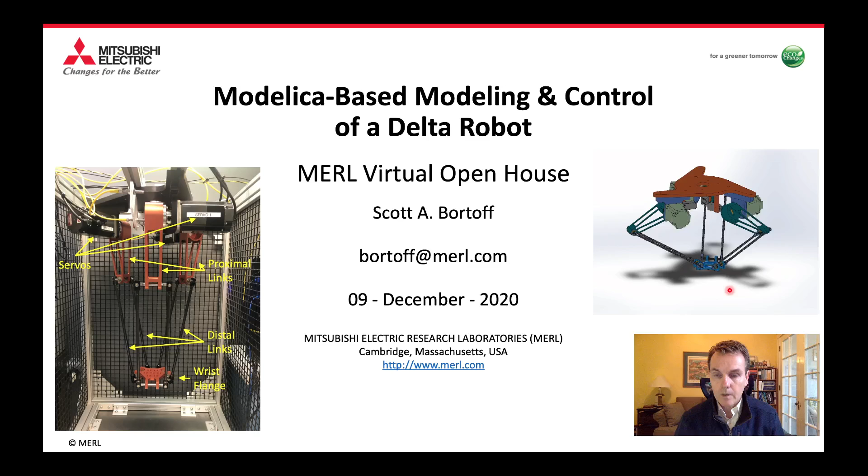So if you're not familiar with Delta robots, here's a movie of one up here. They're interesting closed chain manipulators that are actually very useful for what we're trying to do.

Our long-term goal is to develop robotic technology that enables mechanical assembly of complex things like this cell phone, which consists of many small parts and plugs and things like that. It turns out the Delta robot has a number of good properties for that problem, so we've built one at MERL, and we're developing the control technology for that, which is based on modeling both the robot and the mechanical task here, all the parts that get assembled.

It's an exercise in controlling contact and collisions. The mathematics and techniques we use for modeling and control can be applied to a lot of other problems, some toys and some serious problems we see at Mitsubishi Electric. For example, in an elevator shaft where you have a rope like this, as it comes over the sheave, it comes into and out of contact with the sheave. That physics can be modeled along with the bending of the rope and the motion of the cars using the mathematics we've developed here.

Similarly, things like this toy ball maze, where the ball rolls in the maze and comes into and out of contact with the rings, is a similar problem with loss of contact and recontact. You're trying to manipulate the maze to get the ball into the center. That's a problem where we've not only modeled it for simulation, but used that model to design a feedback controller to solve the ball maze.

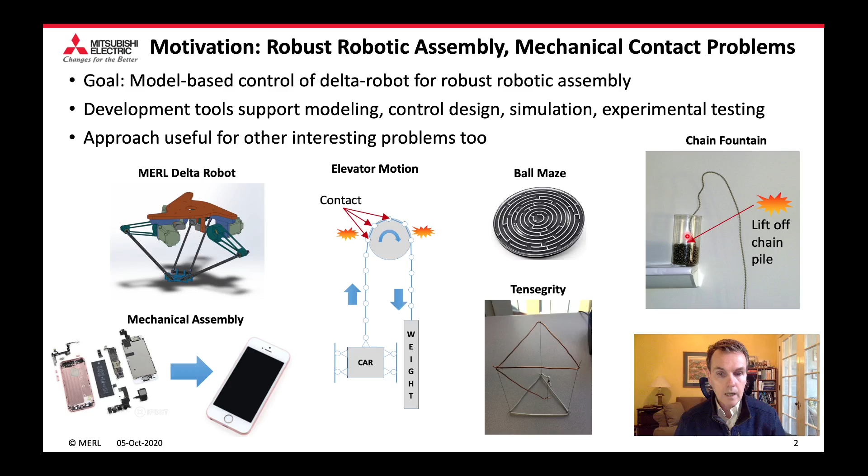So what I'll show you here in this movie, which is about 25 minutes long, I hope, is basically some results that I've presented at various conferences over the last couple of years. We'll talk about Delta robots and how they compare with more conventional serial link robots.

We'll derive the kinematics and dynamics of the robot, which is a bit different than serial link robots. We use the Modelica modeling language at MERL quite a bit for vapor compression systems in particular, but also robotics—it's a very useful object-oriented language to represent this type of physics. We'll talk a little about control, some of the lower level feedback we've developed for this application, and how to model some of these assembly tasks themselves, which is an interesting problem in and of itself, and turns out to be very consistent with how we model the robot.

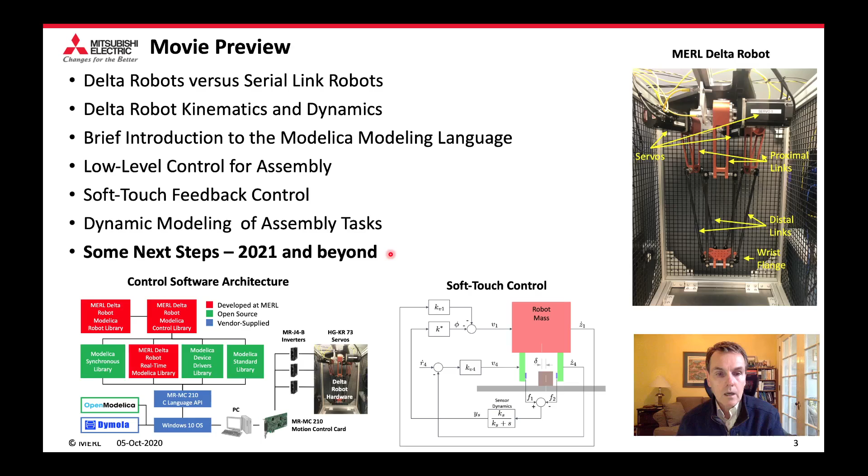And then here's some of the next steps we're going to be pursuing, particularly next year, experimentally in our laboratory.

So serial link robots—most people are familiar with these if you're into robotics at all. Basically, this is an open chain of links, with one actuator per joint. The actuators tend to be mounted up in the structure, so therefore these things tend to be relatively massive, have a lot of inertia, and are relatively slow compared to a Delta robot.

Because you're putting servos up here, you tend to have high gear ratios, which leads to higher friction. Older robots tend to be not backdrivable, although newer ones like this Cobot that Mitsubishi Electric sells actually are. But the point here is that these tend to have very high, relatively speaking, mass and inertia. So when you're doing a contact type operation, when you have a collision, these can impart a lot of mass or momentum into whatever you're trying to assemble, and that can cause some damage.

Now, if you look at a delta robot, because the servos are all mounted here at the base, which is inverted in this example, these links tend to be very lightweight, low mass. Moreover, because you've got unactuated universal joints here and here, there's no torque on this link, the distal link, and so there's very little bending of these joints and links. This tends to be very precisely mechanical, with very good repeatability.

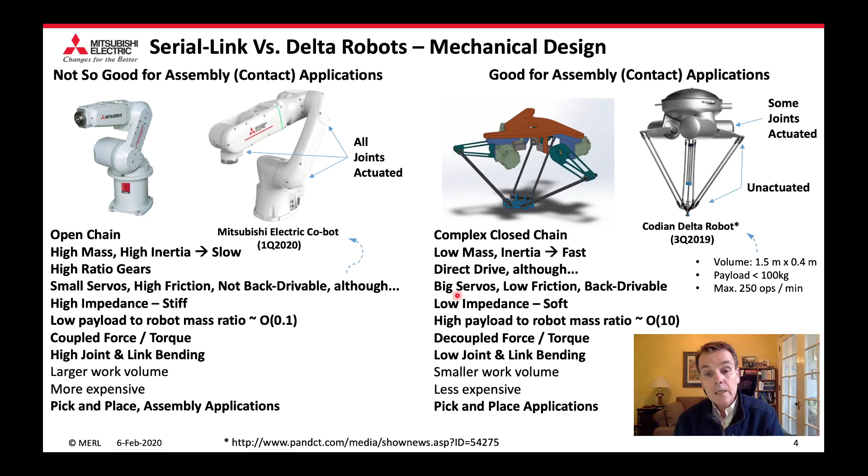But our primary interest in them is the low impedance that we can achieve, which is in part due to the low mass and in part due to the control that we'll talk about later.

So now if we talk about the kinematics and dynamics, there's some interesting differences. The forward kinematics of a serial link robot can be written explicitly. There's a formula you can derive depending on what type of robot you're looking at. So it's analytic, it's closed form.

The inverse kinematics, usually you cannot do that. But because I can express the forward kinematics, deriving the Jacobian and the dynamics is a relatively straightforward exercise, that's been well known for many decades.

Now, the delta robot is what's called a closed kinematic chain. And so the implication of that is that the forward kinematics are actually an implicit set of nonlinear equations, and they cannot be solved in closed form. And so that has implications.

One of them is the Jacobians. It turns out that there are two that are of interest, and at least one of them can't be expressed in closed form. And that has implications on the dynamics.

The dynamics we can express explicitly if we adopt a differential algebraic equation framework, and so that's what we're going to do. Interestingly enough, for a lot of these closed chain manipulators, like the delta robot, the inverse kinematics can be expressed explicitly.

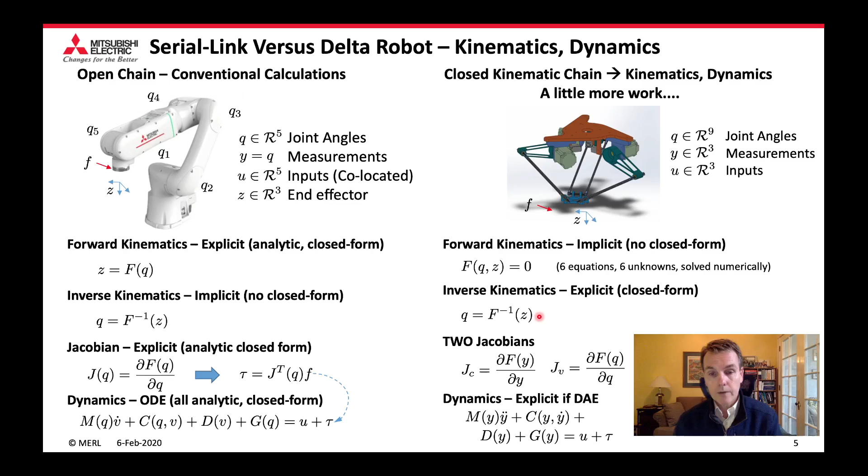You can actually write down closed form expressions for the inverse kinematics, in other words, the map from where this wrist flange or end effector is in Cartesian space back to the measured joint angles, which are these servomotor angles. It's just a rather cumbersome exercise in trigonometry.

Okay, so it turns out that most delta robots today are used for relatively simple pick-and-place type of operations, and that needs very simple control. In fact, that control doesn't need to know anything about the dynamics of the robot.

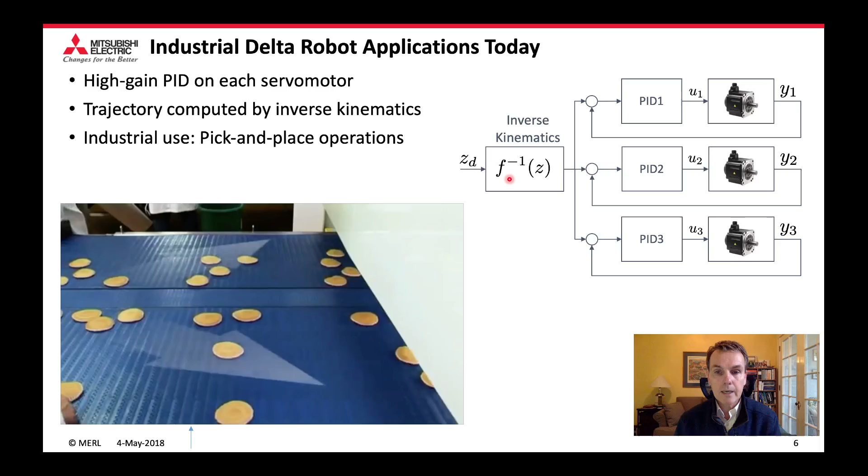We basically close PID feedback loops around each servo. That PID tends to be software that's already inside the inverter, so you don't need any extra hardware. We usually want to compute the inverse kinematics, so we can do some sort of path and trajectory planning, but that's relatively straightforward. And so here's a sort of typical example of how you might use a delta robot.

Whoops, here we're sorting some pancakes. Well, that's fine, we'll skip the video.

So our primary application is, again, we want to do assembly with these types of things. And so what we're going to want to do is derive feedback control laws based on a dynamic model for which we can modify the robot's impedance to get very soft contact.

And so the dynamics that we've derived are based on a differential algebraic model. We published it a couple of years ago. Basically, very simple idea: we write down the kinematics of each individual arm, assuming they're not connected at all here.

So those are open chains. We can derive the dynamics of each one of those. We have a joint here at the motor and a universal joint here, and we derive a set of dynamic equations from that in a straightforward way.

Then you augment that. We basically augment the Lagrangian with the holonomic constraint that all 6 of these links need to come together. There are 6 nonlinear equations added to this set of robot dynamics. We end up with 24 equations, 24 states. 6 of the states are these Lagrange multipliers, so they're algebraic constraints.

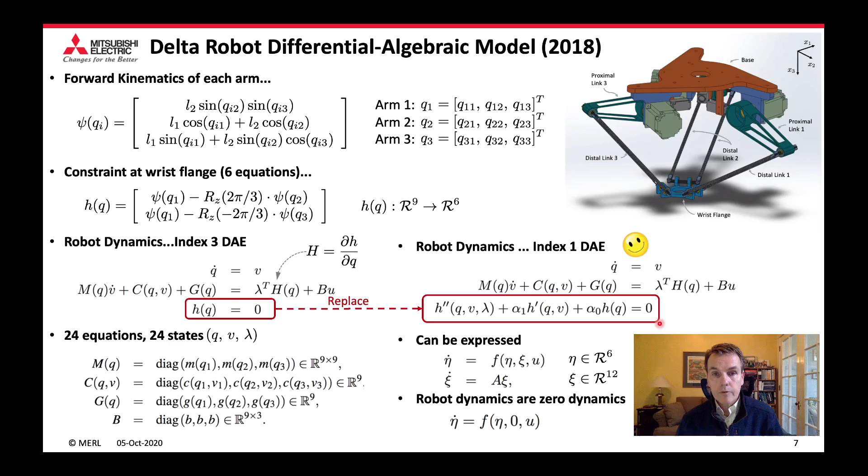Usually we want to reduce this index to 1 or 0 so that simulators, simulation algorithms, and control theory work a little better, and so we do that in different ways. Here we're going to replace this constraint with a linear combination of its first two derivatives with respect to time. Now I have an index 1 DAE. It's global, no singularities, and actually very useful for deriving different types of control algorithms.

Now, it turns out that for most serial link robots, you basically compute the Jacobian of the forward kinematics, which is the map between forces and torques applied here at the wrist back to forces and torques at the joints. But for the Delta robot, not all the joints are actuated.

It turns out there are two Jacobians that we're interested in. The first one is only for simulation, and what it is, it's the map from this force to all of the joints, so we can use this in a simulation. It's not useful for control. We need a different Jacobian for that. We'll talk about that on the next slide.

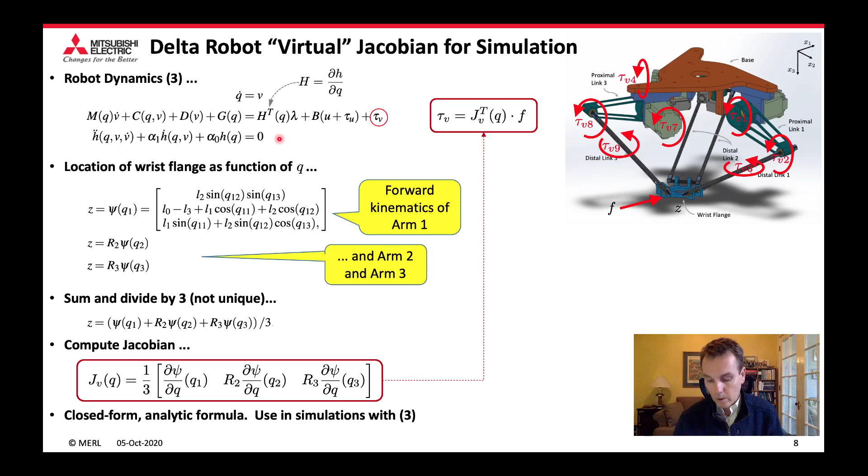This is relatively straightforward to derive because it's just dependent on the forward kinematics of each arm independently, which is an open chain. There are actually many different formulations for this, but we can compute this as basically a simple derivative, the Jacobian of each forward kinematic of each arm. And this is what's important: it's a closed form analytic formula. We can use this in simulation together with this dynamic model, and we get a smooth, singularity-free model throughout the entire workspace that works very well with index 1 DAE solvers.

Now for control, we need something a little different. Again, the Jacobian here is the map between forces and torques applied at the end effector or wrist flange, back to just the servomotor torques. So if we want to apply a torque or a force to an object, this is the torques we apply to the motors. Now by construction, torques applied to this wrist flange are just absorbed by the structure, which is another nice benefit of the Delta robot. It decouples forces and torques here, and that simplifies the overall control.

But this is what we call the control Jacobian. This is the Jacobian of the forward kinematics, which again is not solvable, so we need to use some sort of numerical solution or algorithm to compute that. Here we're using Newton's method to solve the forward kinematics, and then it's an application of the implicit function theorem a few times, deriving these equations, and we can then compute this Jacobian numerically.

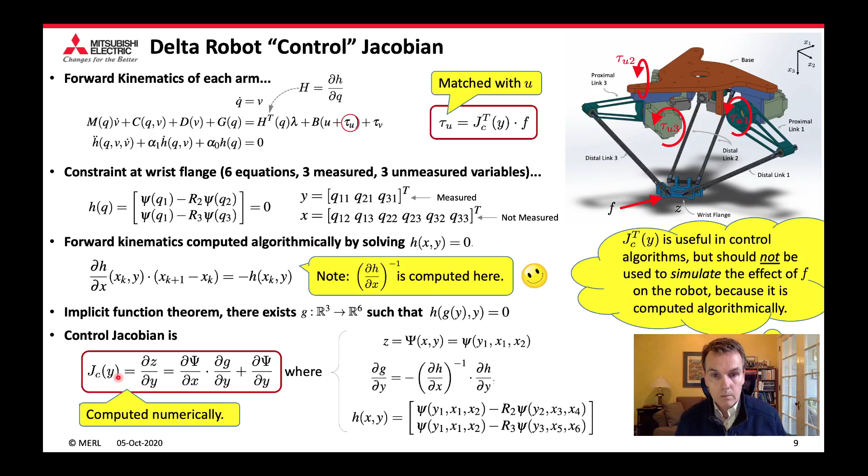So when we're deriving control laws, which will be implemented in discrete time, this is what's used there. This is not used in any sort of simulation of the robot, again, because it needs to be computed algorithmically, and so it has a termination condition. This means it's computed not continuously, and that will cause problems with any sort of index 1 solver. So we use the previous one for simulation and this one for control.

So we make a lot of use of the Modelica language here at MERL.

The Modelica language is an open source language intended to model and primarily simulate multi-physical, heterogeneous types of systems. Think of it as systems of systems. What's interesting about it is that it's an a-causal language.

It's an equation-based language, meaning that when we have physics equations like this one, these are 5 equations describing the motion of a pendulum in Cartesian space, so they look a little funny. This is an index 3 differential algebraic equation. We can transcribe that directly into the language. The important thing here is mass times acceleration equals a force.

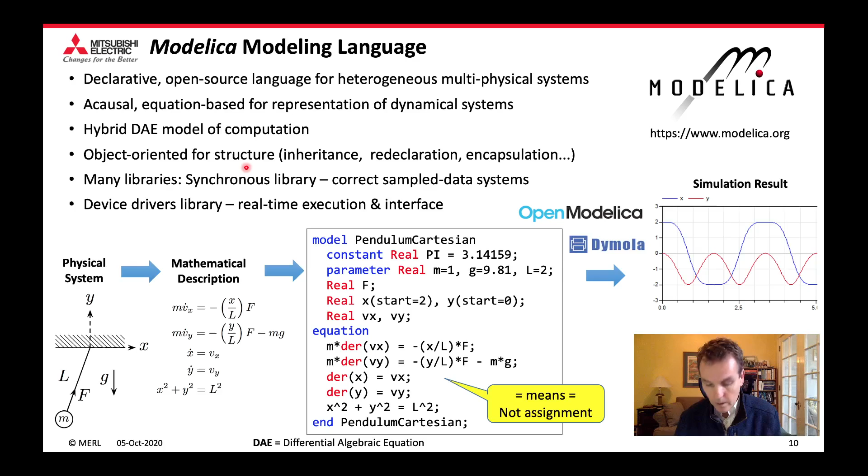The equal sign here means equals, as it does in physics. It's a constraint between variables, not an assignment as in many computer languages. This allows us to express physics very naturally, and it has a lot of object-oriented structures useful for creating libraries and models, particularly in robotics, multi-body systems, and thermal fluid systems.

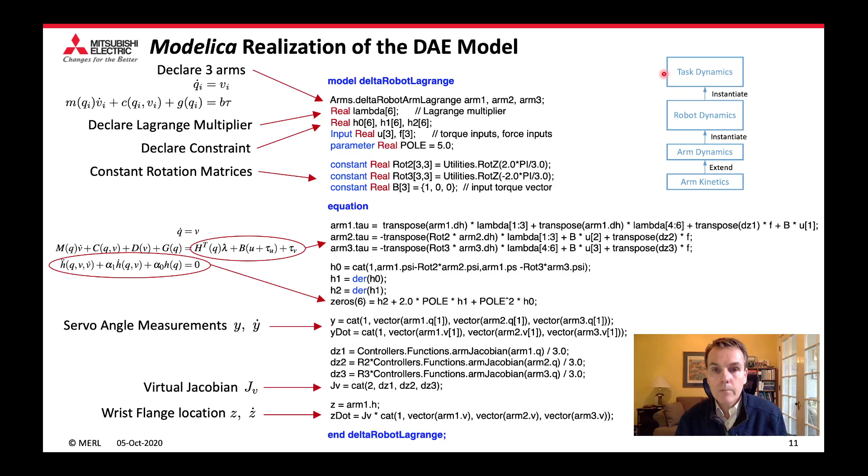So we make use of a lot of object orientation here. We start with the arm kinetics, which are in a different file, extend that to derive the arm dynamics, and instantiate that 3 times in the robot dynamics. Then we can instantiate many different robots, this robot in a larger task space, and model the task itself. The important thing is that the language and mathematics extend from the robot all the way into the task we're trying to accomplish.

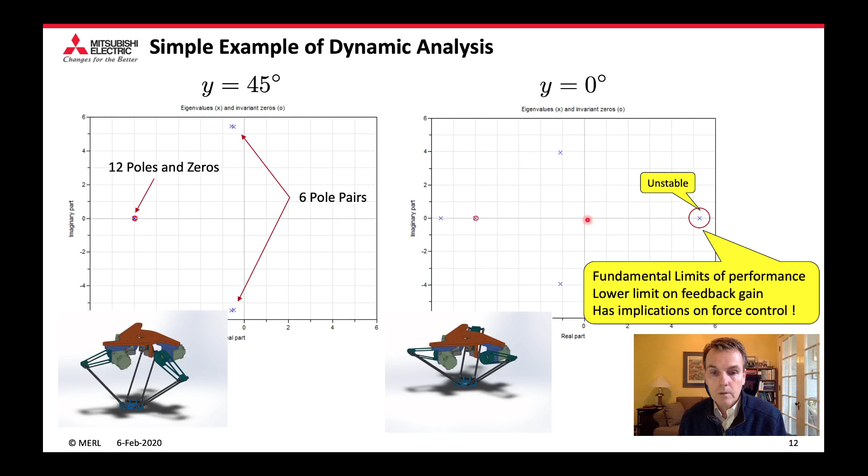Another interesting thing about these robots, which I find rather amusing, is that they have different types of kinematic singularities. I'll give you an example. Of course, when each of these links is straightened out and fully extended, that's a kinematic singularity. But another one happens when all 6 of these distal links become parallel.

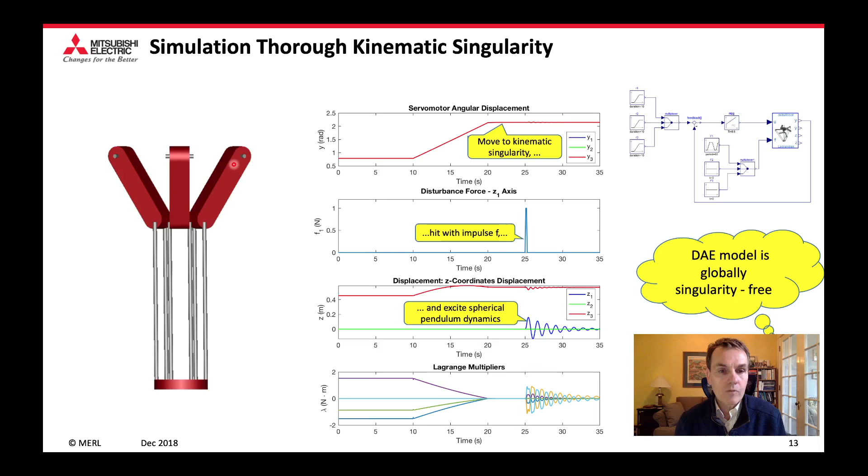So there are really 2 points here. One is that the model works everywhere - it's global, it's singularity-free as a model. If we were to express the dynamics in terms of just the variables for the motors, which I call y, you'd find that model has a singularity, and you'd have to do some sort of switching to get around it. The other thing is, of course, the control system needs to avoid this configuration because it's sort of useless as a robotic manipulator.

So let's talk about assembly control. Basically, the strategy is very similar to any type of robotic application. We have a stack of software and hardware.

At the lowest level, you have your hardware and then an inner loop control. In this case, we linearize the robot dynamics and then have an outer loop where we can adjust the feedback gains to modify the robot impedance depending on what it's doing. Then another outer loop for planning the path and trajectories, and finally, at the highest level, some kind of task planning.

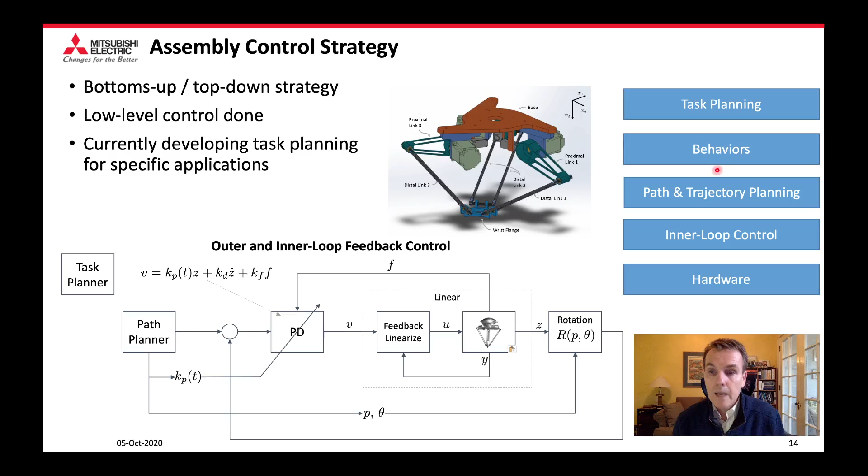In terms of where we are, we've built this in our laboratory. The inner loop control is essentially finished, as is the outer loop control. We've done a lot of path and trajectory planning, and we're now designing different behaviors. We'll talk about one of those later. These behaviors are a mix of finite state machines and, in some cases, optimization-based control. Then these behaviors get organized into larger tasks.

Let's talk about the inner loop control a little bit. It's more complicated than it would be for a serial link robot because we've modeled it as a higher dimensional system, embedded in an 18-dimensional space when expressed in index 1 form. The first step is we have to cancel out the effect of gravity.

So if we look at the dynamics, here's the inertia, these are the Coriolis and centripetal forces, this is damping, and this is the gravity force. We're going to use the torques to cancel out the gravity force, and essentially that cannot be done explicitly. These are implicit equations, so we basically have to solve this 9x9 system of linear equations in real time.

So we solve it for this control torque. We also get the Lagrange multipliers out of that if we want to use them in some other control context. We end up with this system, and again, this is in a higher dimensional space.

What we need to do is separate the measured variables, which are these servo motor angles, from the unmeasured variables, which are the joints. So we need to eliminate those from the dynamics, and that's what this step is here. We end up with this equation, so it's starting to look a little more linear.

Depending on which coordinate system you want to linearize it in, you get these two control laws. The more useful one is the second, where it's actually linearized in the task coordinates. To implement this, we need to compute this effective inertia matrix and also this inverse Jacobian, which is the control Jacobian we saw earlier.

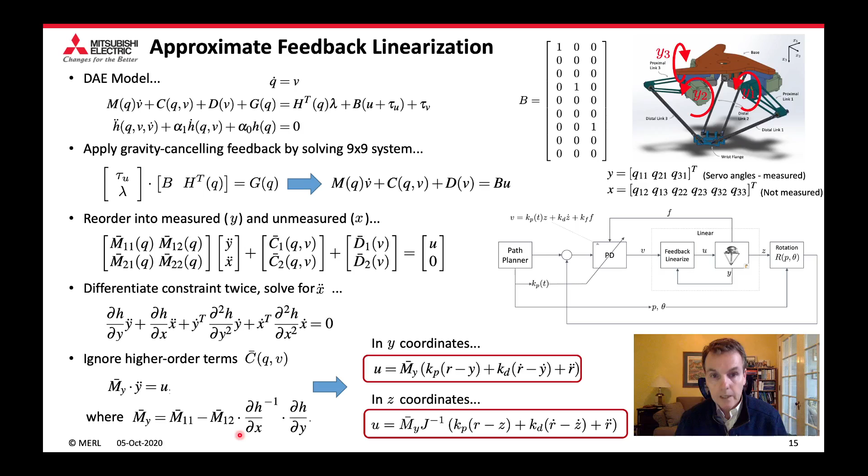This feedback control will, of course, have singularities. You cannot move the robot through that kinematic singularity we saw earlier, or this inertia matrix will actually go singular at some point. Actually, what happens is this map goes singular, and so we need to avoid that during operation of the robot.

Now, we actually implement all of our control algorithms natively in the Modelica language. This has a synchronous library and also a device drivers library. The former allows us to implement the correct sample data behavior, and the latter allows us to run this controller in real time, so we can do desktop simulations in real time. We can also do our experiments in real time. We'll talk about that on the next slide.

Here are the continuous time dynamics of the Delta robot. It's actually in contact with a Lego brick. In this example, we have the forward kinematics, which need to be computed algorithmically, our gravity feedback, and this is the feedback linearizing control in the y coordinates in this example.

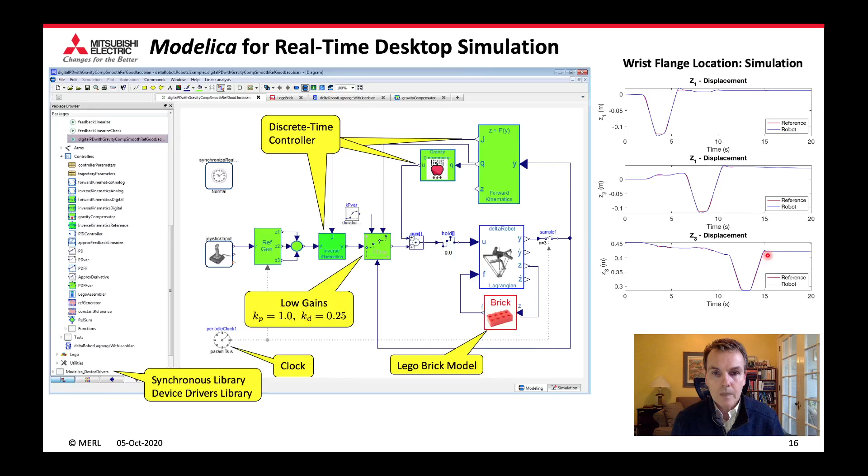Here's an example where it's just following a trajectory generated by the joystick. You see you get perfect tracking because there's no model uncertainty. Of course, this is a simulation, but this is the important thing: we can then take that controller, which is implemented in Modelica.

We basically strip out the continuous time model and interface it with some real-time software we've developed. Recompile this thing, which is a button push, and we can run exactly the same experiment now using our actual Delta robot hardware, shown down here. Here's a simple example where it's doing the same sort of trajectory tracking.

Of course, the tracking here is poorer because we do have a little bit of model uncertainty. And here we've really reduced the gains a lot to show off that model uncertainty. So in a real application, we would want to increase these gains quite a bit, again, when we want to do the SoftContact that we'll talk about in a little bit.

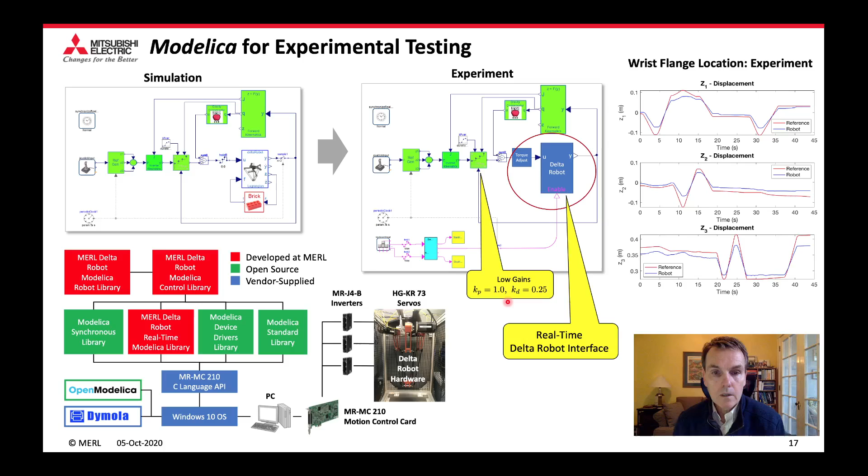So let's talk about this. There are two aspects to achieving this SoftContact by impedance control. The first is to reduce the feedback gain. In this case, we'll just reduce the P gain in the outer loop all the way to 0 as it comes into contact. And the reason we can reduce it all the way to 0 is because we've feedback linearized it here and compensated the effect of gravity that actually causes that open loop instability. So the outer loop now can be tuned or detuned all the way down to 0.

Here what we're trying to do is we've got a few games that we play, but one of them is to play this game called Jenga. In Jenga you basically pile these wooden blocks on top of each other like this, and the idea is to push out one at a time, one player at a time. The one you push out you need to stack on top, and so you keep building this tower up until it falls, and whoever knocks it over is, of course, the loser.

These are interesting games. The Jenga blocks are actually not very precisely machined, so there's a little bit of variance in their height. If these were all the same height, of course, the game wouldn't work. Because there is a little bit of variance, there's always one or two that are loose that you can push out, but of course you need to do it very softly.

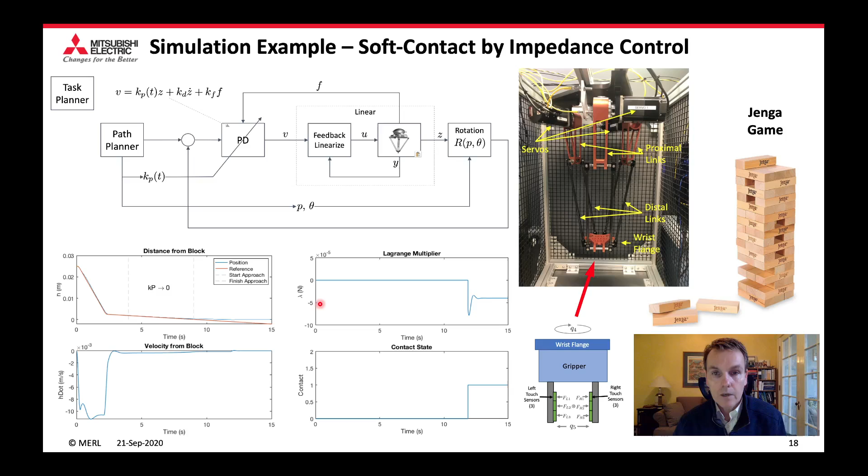So here the robot is actually coming in contact with one of the blocks. You basically approach it at low velocity, detune the gain to 0, and then when you actually do come in contact, it's very soft force. Here it's 5 times 10 to the minus 5th newtons, which is sufficiently soft so it doesn't disturb this in the wrong way. So that's half the game.

The other half of the game is that we can actually do better than that. In a lot of cases, we have a little bit of uncertainty as to where an object is in space. And when we try to pick it up with one of these parallel grippers, the fingers of the gripper are shown in green, and the robot mass is represented here in red.

Here's a Jenga block, for example. If you were to try to pick this up, what's going to happen is this is going to slide over and you're going to lose the game. In an industrial application, there's position uncertainty, and you really want to be robust with respect to that. We don't want to impart any momentum or force, or as little as possible, onto that block.

So here we're using some tactile sensors that are mounted on the inside fingers, and we just derive a very simple feedback controller. We take the difference between the left and the right, feed the difference back to the outer loop control, that feedback linearizing control, that controls the robot horizontal position.

What that achieves in the frequency domain is it greatly reduces the impedance, which is the gain here. Here it's the gain from finger velocity to the contact force, or from finger velocity to block velocity. And so you can see that in the frequency band where the control is effective, you're making the robot softer. You're going to impart less energy to the object that you're trying to pick up in this case.

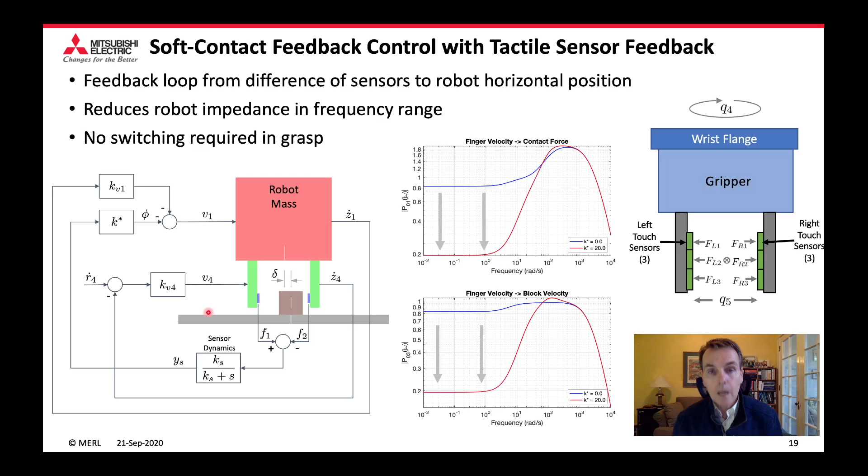This is purely system type thinking that is intended to reduce the robot impedance. As it picks up this block, there is no switching or anything like that. We can achieve a grasp that's very soft without any sort of hybrid logic, which is very important because it's difficult to tune that in practice.

So I'll show you an animation, a bit of a close-up here. Basically, for the first animation, these yellow things are the touch sensors, but we're going to ignore that - there's no feedback. This is what a robot would do after I've detuned its position gain, so it's as soft as it can be. I'm using a low mass robot.

However, this block is very low mass itself, and so if we try to pick that up, what's going to happen as the two fingers come together? Of course, they're going to move the block, which is undesirable. So we'll show that again, and here's the graph of that - you can see the block moves in this case in an undesirable way.

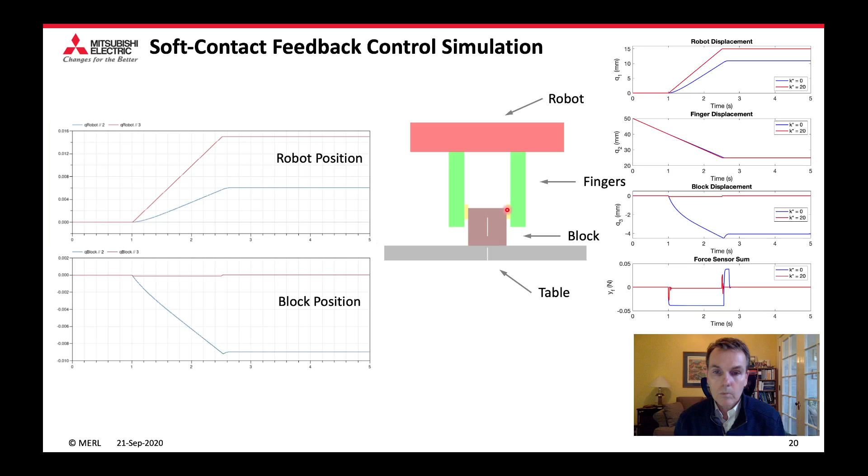So next what we're going to do is turn on the feedback controller. Basically now we're using the tactile sensors, feeding that back to the robot position control. What you'll see is we can achieve a very low amount of motion in that block. Here's the simulation, but again, this is derived using a systems derivation - there's no switching as we pick this thing up. In fact, after we pick it up, we can also put it down, and as we put it down, also impart very little velocity using the same type of feedback.

So regarding modeling contacts, there's an awful lot of previous work on this subject, particularly the last 20 years or so out of the computer graphics community. So there are all sorts of these so-called physics packages, Bullet, PhysX, Gazebo, et cetera.

So honestly, what these things do is basically represent contact and collisions as very large, in some cases nonlinear, complementary problems, which are approximated by linear complementary problems, LCPs. These can be solved as QP problems, and essentially they all work the same way. You discretize the dynamics, you solve a constrained QP at each discrete step. There are very efficient solvers for that, of course.

Really the only purpose of these things is to simulate. So it's difficult to use these models in any sort of mathematical way for model-based control design, for example, to analyze the dynamics because the solvers are all mixed together with the model itself. There are also issues with these solvers - basically the success criteria is, does the simulation look good? But in fact, energy is not necessarily conserved, and there's a lot of tolerances that need tuning.

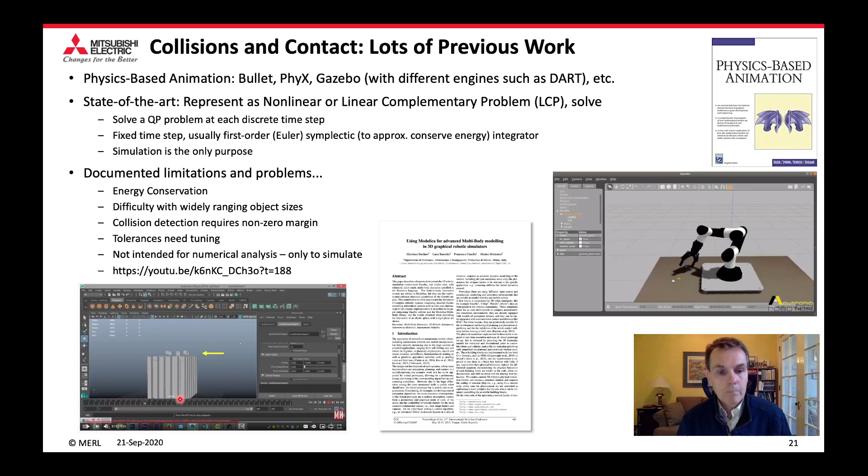Here's a simulation of a very large number of blocks that are being dropped onto a table, and some of them bounce higher than others. Now that's what you would expect if you were actually doing that experiment on your desk. But since all these blocks are identical, the simulation should actually be the same for each block, and it's not. This is most likely an artifact of the solver, not necessarily the physics.

And so we're thinking about different ways to model contact and collisions in ways that are consistent with the way we model the dynamics of the robot itself. This is one idea where we have both the same sort of structure of models - you have basically a constrained dynamical system. The constraint here is the Lagrange multiplier, which is the force between objects. And we add to this a state machine that basically dictates whether or not this Lagrange multiplier is active or not.

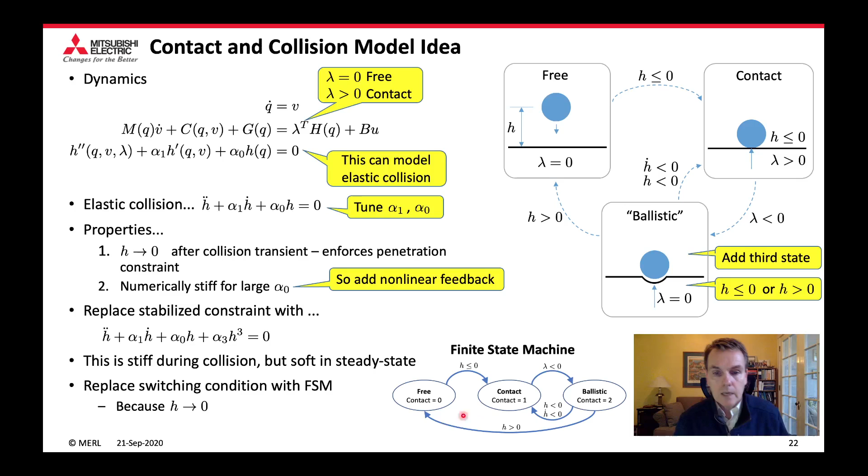So this is another way to think about how to solve a nonlinear complementary problem. Only instead of solving it as an optimization problem, we solve it as a dynamical system using DAE solvers. There's a little bit of math here about how to represent elastic collisions and how to design this finite state machine so it's well behaved. But it tends to work pretty well for low-dimensional systems.

And here's sort of a toy example - again, it's this ball maze game. This has been used in vision research at MERL.

The idea here is you want to tip-tilt this ball maze and get the marble into the center. We're going to cheat a little bit to solve this game. Instead of doing tip-tilt, we're going to angle the maze up at a certain angle, then rotate it about its central axis. That's the only degree of freedom we're going to use. Here's the central axis, we're just going to rotate it.

Essentially what we're going to do is stabilize the ball against one of these rings using feedback. So we need to measure the ball position, that's the only measurement we require here. Then we're going to rotate the maze underneath the ball until the ball just falls into the center.

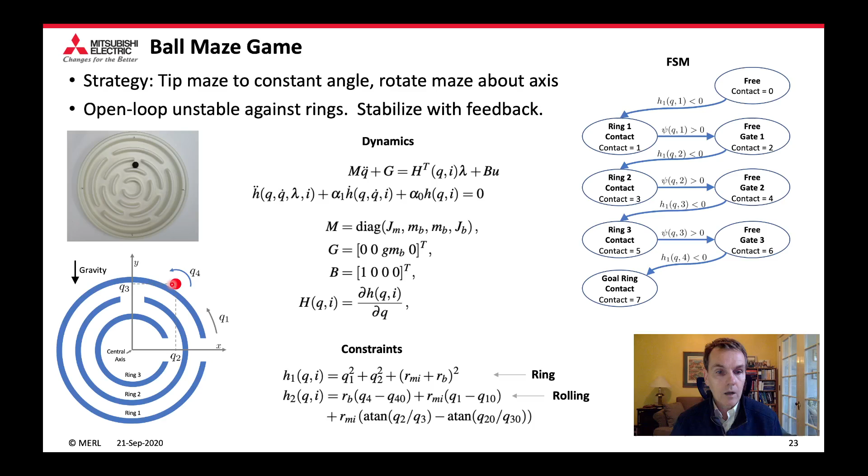The point here is we can derive the dynamics just like we did earlier for the robot. There's some constraints, some finite state machine here to represent either contact with a ring or, when it's falling through a ring, non-contact. It switches back and forth between those. The point is that now we have a mathematical model of this, and we can use it to design feedback controllers to stabilize the ball.

Basically the control problem is relatively elementary. We just use a root locus here and 2 lead filters. First to stabilize the ball against a ring, that's what this root locus is, and that's what this feedback loop is. The second one is you need to stabilize the actual maze. There's a pole left here at the origin that you need to move away. So we can tune all of this using the model.

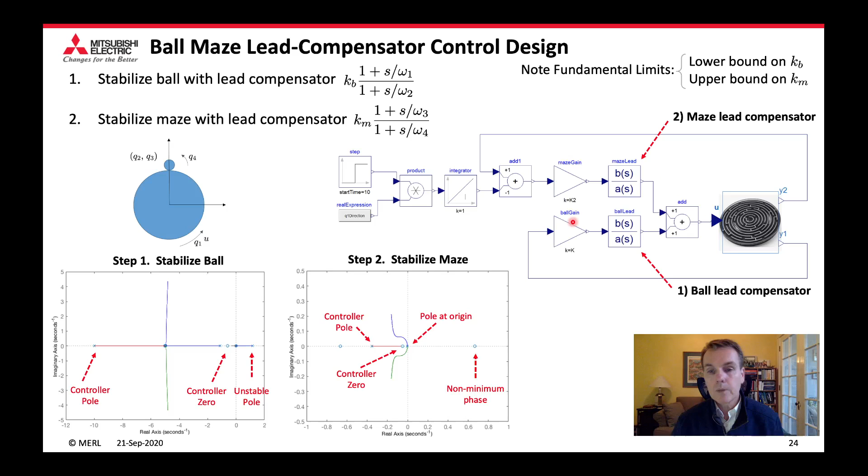We implement this feedback controller in our Modelica language, and then simulate the ball maze. Here's some fun simulations where you can basically start the ball from outside the maze. It falls onto this because of gravity. This thing's tipped up, and then we rotate the maze back and forth. It's rotating back and forth as the ball just sort of falls and eventually reaches the center.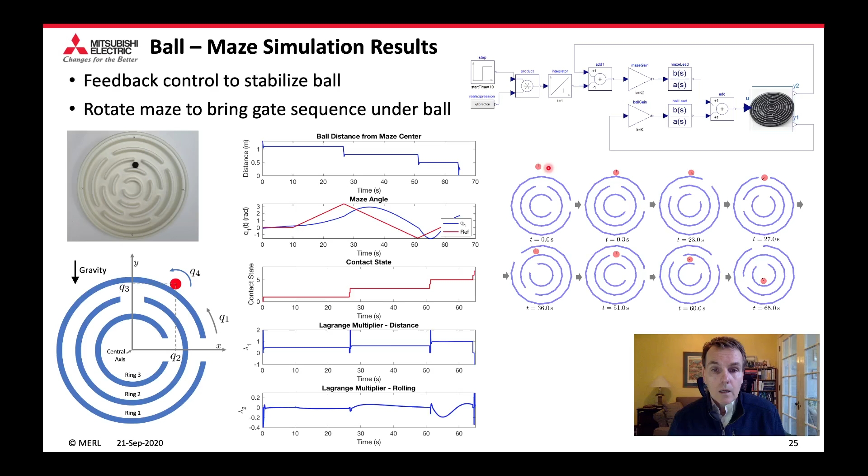Anyway, this is a good example of how you can use consistent mathematics with the robot, or in this case collisions, in order to derive a controller and also simulate it. Again, we want that consistency among the different formats of the model.

I'll finish up here. What we're doing with our robot next is basically we've begun to solve a bunch of toy problems. One of them is assembling Lego. Robots have done that before, but they have perfect knowledge of the geometry, and they tend to use larger, standard Legos that are very precisely machined, with very high tolerances, similar to factory automation applications. There's also a pretty high ratio between the impedances you need to successfully put something like this together.

The Jenga game is also another fun game for the robot to play, again because you need to push these out very softly and grasp them, subject to some uncertainty in their position. In order to do this, we've actually developed a 6 degree of freedom wrist that we will add to the robot very soon.

This is basically a Gough platform. Some people call this a Stewart platform, but actually it was invented by a gentleman named Gough. This provides an additional 6 degrees of freedom added to the 3 it already has, we get 9. And then the gripper, of course, has its own, so we have a system with a total of 10 or 11 degrees of freedom, depending on how this gripper is operated. Turns out that the Gough platform can be modeled and controlled in exactly the same way that the Delta Robot can be.